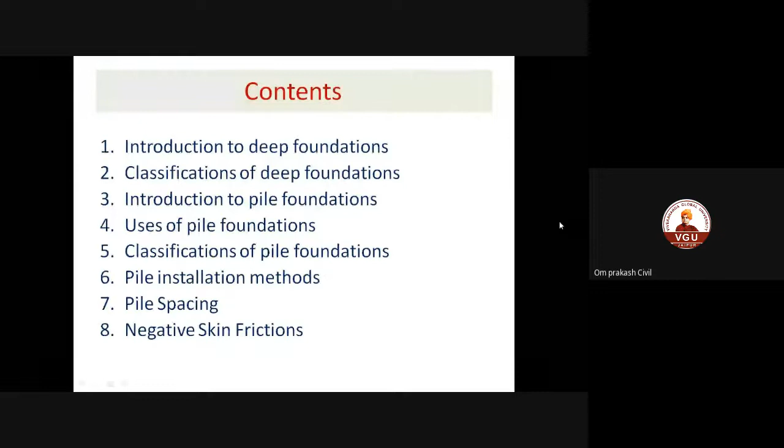In the first part, I'll be talking about the theory, and in the second part, I'll be sharing with you some of the experiences that we come across in the field. To start with, I'll give some details about what deep means, pile foundation, then the various types of pile foundations, how piles are classified, how we can go ahead with the installation, then pile spacing, negative skin friction, etc. This is purely from the theory point of view. In the first part, some 1 hour I'll be talking. In the next 1 hour I will try to share some of the field experiences.

Any problem with the sound? Hello? Is it okay? Can you hear smoothly? Some sound disturbance is coming. So some of you mute it, Om Prakash, mute it so that this... I request the participants to mute, otherwise some sound disturbance is coming.

Pile foundation is the foundation that provides support to the structure from the toe resistance. The toe resistance we call it as end resistance. And it may be from a firm soil, a dense sand, or a hard rock. And from the shaft resistance that is generated by the skin friction that is developed. So there will be two components: one known as end bearing and the other known as the frictional component.

If the load carrying capacity is mainly contributed by the end bearing, we call it an end bearing pile. And if the load contribution is coming mainly from friction, we call it a friction pile. Generally, the pile will take load from end bearing as well as the frictional component. Depending upon the site condition, end bearing may be dominant, or sometimes if the structure is small you will be able to satisfy with friction alone. We call the pile as a foundation as a deep foundation when the depth to width ratio is greater than or equal to 4.

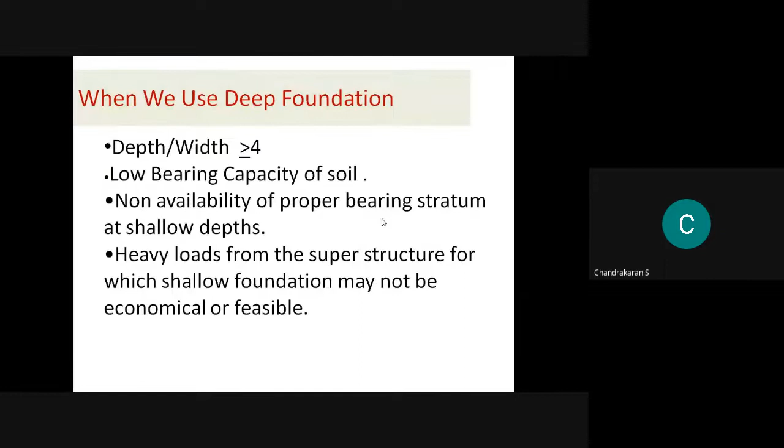Whenever the bearing capacity is low and we want to overcome the soft soils that are present, then we will go for pile foundations. That is when we will not get proper bearing stratum at shallow depths. Heavy loads from the superstructure are likely to come, and we feel shallow foundation may not be economical or feasible. Then also we'll go for pile foundations.

Deep foundations may be classified as pile, pier, caisson, or well foundation, and sometimes sheet piles also included in this. Among all, nowadays caissons and well foundations are getting outdated because the labor involved in construction is very high, and the difficulties in construction of caisson and well foundations are more. In those cases, piles are replacing caisson and well foundations. Caissons or well foundations are heavier in section and are sunk to the required depth, and the process is a little bit tedious.

The pile foundation means a post. It may be made up of concrete, steel, timber, or a suitable material, and acts as a structural element for transferring loads from the superstructure to the deep where strong or firm strata is available. The basic difference between the column and the pile is confined by the soil, whereas column is a freestanding structure. Sometimes the pile may also become a slender member depending upon the availability of the depth of firm strata. Sometimes this pile may be subjected to moments as well as lateral loads. That possibility is also there.

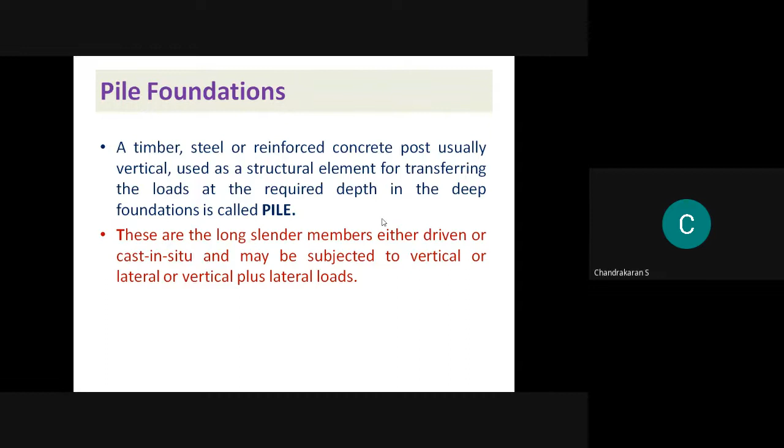Now I am just going through different steps involved in the construction of pile foundations. One is erection of the rig. Rig means the 3 legs and a center there will be a pulley. Then we will try to do boring, that is making a hole on the ground.

For that purpose, we will be using bentonite slurry inside this hole so that caving can be avoided. Parallelly, a team will be doing preparation of the reinforcement cages. They'll be preparing some stands and keeping the reinforcements. Then the reinforcement will be inserted gently into the borehole without touching the sides.

After that, the tremie pipe that is used for concreting will be inserted. After inserting the tremie pipe, the top conical end will be kept on top, and design mix will be prepared and transferred into the hopper. Finally, this tremie pipe will be lifted stage by stage, and during that process it will be given some shakes, meaning it will move all around so that some compaction is achieved. So the third stage is lowering of the tremie pipe, and the fourth one is pouring of the concrete.

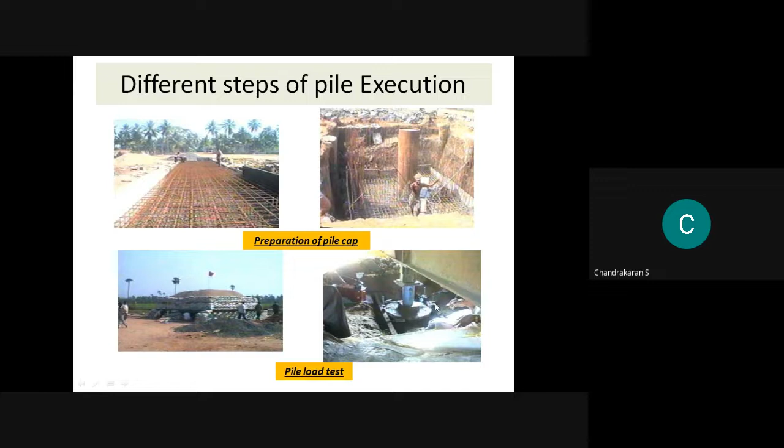Before going into this, the code says we have to test some of the working piles as required. We have to do tests on some of the piles, and that has to be done in order to confirm the load carrying capacity obtained from calculations matches the field conditions. These are the steps involved in the construction.

Now I'll go for the classification of piles. We can call the pile as end bearing or compressive strength type of pile, provided it transfers the load to a hard stratum. The second one is the pile may be used to take care of the scour depth that occurs in a river, or wherever tidal effects are there, we have to take care of the scour depth. Then the pile may be classified as tension pile or uplift pile, and if it is used for taking care of the uplift, we call it an uplift pile.

Sometimes in electrical towers, if there is a breaking of the wire, there is a chance that the tower may tilt. In such cases, the pile may be subject to tension. Such tension or uplift piles have to be taken care of.

The piles also have to be taken care of for horizontal loads. Depending upon the requirement, we change the type of pile to control the anchoring, or sometimes use fender or batter piles. In machine foundations, to control the vibration that is transmitted, called passive vibrations, that has to be controlled, and for that purpose too we can use foundation piles.

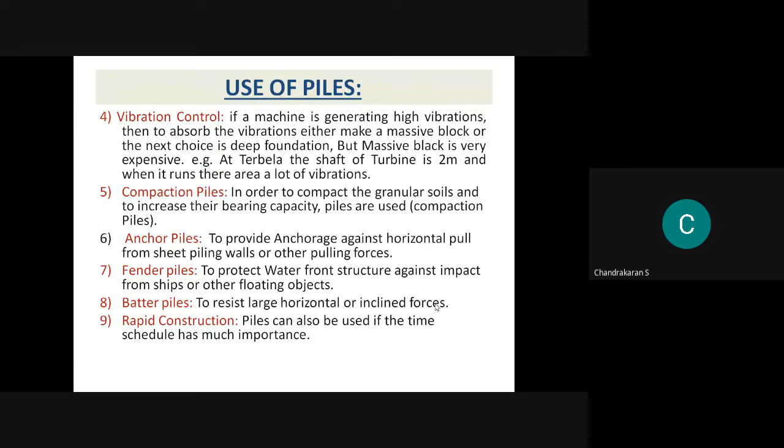Then we have another type known as compaction piles, used for ground improvement in the form of columns. Depending upon the function and the type of load transfer, we can give different names.

The classifications are grouped based on method of construction. This means we can have hand augers, chisel type of drilling which we call DMC piles, or if using a rotary type system, we call it a rotary pile. Like that we give different names. Then it may be a precast pile or a cast-in-situ pile, depending upon the type of construction.

Again, based on materials, it may be timber, steel, concrete, or composite - different names for different materials. Then based on the material of the load that is transferred, we can give composite types too. Many names can be given.

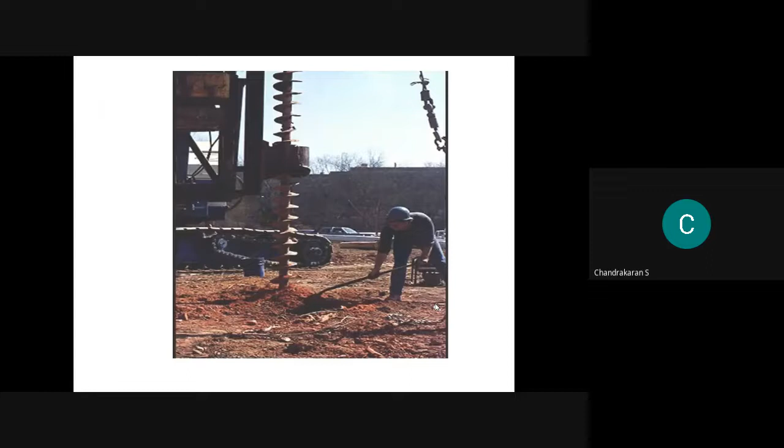The function of the pile is to transfer the load, and again we can classify based on shape and size. I'll show these things - I'll come to the shape, but before that, there's another one.

Nowadays we come across low volume displaced piles. This means that while boring, we will be displacing some of the soil below - that may be low, or sometimes no volume displaced piles. If most of the soil has been displaced, we call it a high volume displaced pile. This can be controlled by the type of machinery used for boring.

Now I'll come to the shape. We can have rounded piles, square piles, octagonal piles, I-shaped piles, straight piles, tapered piles, bell-bottom piles, or screw piles - different piles with different shapes. In Chennai, one company makes Raymond piles; they have their own patent and try to make that type of pile. These are some of the shapes, mainly used in steel piles.

Then a pile can be classified depending upon size - we can call it a large diameter pile or a small diameter pile. Large diameter pile is defined as greater than 24 inches, around 60 centimeters, and this classification varies from code to code. Some books say more than 100 centimeters can be called large diameter, and less than 100 centimeters small diameter.

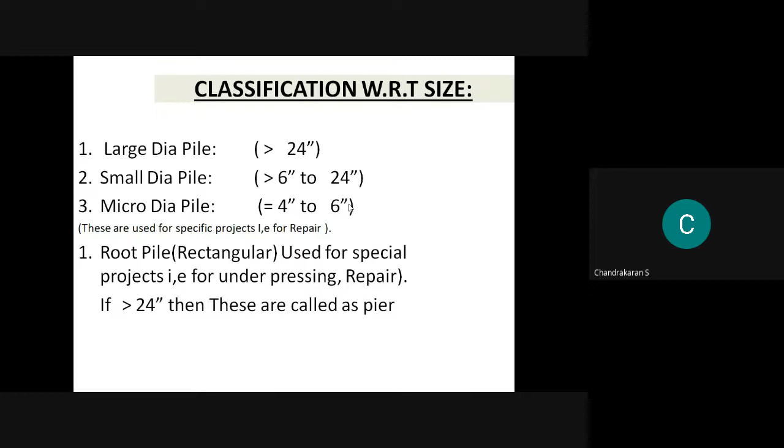Then how does a pile look? It looks like a single long member transferring the load from top to bottom. It may be resting on a hard strata, in which case we call it a point bearing pile. If the surrounding soil also contributes to the load carrying capacity, that contribution is known as friction pile. If the pile is used to take care of uplift or buoyant forces, we call it an uplift pile. Depending upon the need, we design the pile accordingly.

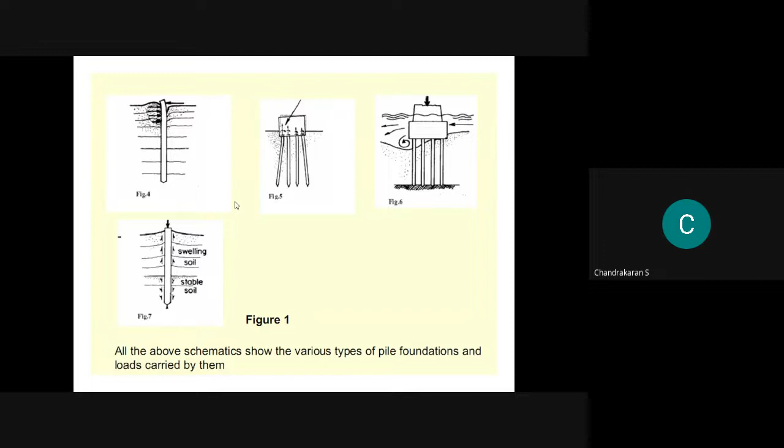Then depending upon construction - this is a precast pile, which will be kept straight, and you hammer it to allow the pile to go down. The hammering should be done in such a way that the soil does not get displaced much - that has to be taken care of, and you have to ensure verticality is maintained.

In the case of bored piles, first the boring will be done with the necessary tools. After making the boring, the cavity will be filled with concrete - first the reinforcement is introduced, then the cavity is filled with concrete. If you fill the cavity first with concrete and then insert the reinforcement, we give it another name: compacted cast-in-situ pile. Like that, we modify the terminology.

Now, the design can be done based on the soil data that is available, either laboratory data or field data. But after the design, when it goes to the field, one has to take care of the installation. Installation is also going to affect the load carrying capacity. So that way, installations are very, very important.

In the case of precast piles, installation is by hammer, pile hammer, or in the case of cast in situ pile, boring by mechanical auger has to be used. Now the installation technique has to be decided based on the site conditions. That has to be well studied before going for the installation.

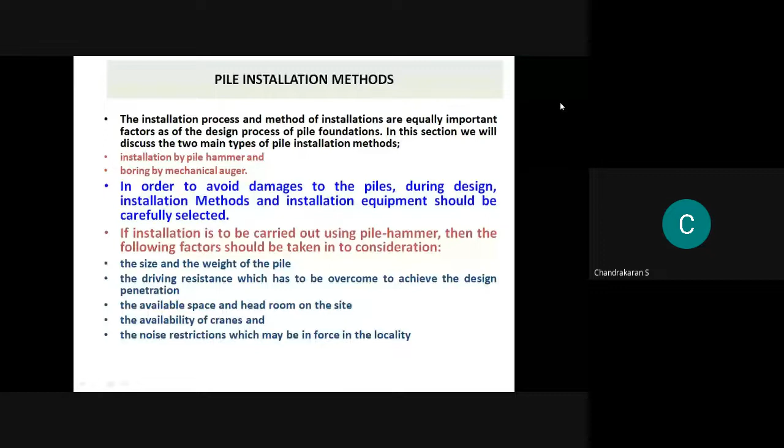Then the availability of the cranes has to be taken into account, which may be in force in the locality. So that also has to be seen. Pile driving methods are by dropping weight, by explosion, vibration, jacking, jetting. All these are used for the precast piles.

Now the piles may be classified as driven precast piles. That is one group - the pile is cast in the yard, brought to the site, and driven by some mechanism into the soil. Or driven cast in situ pile, where a casing plugged at the bottom is driven into the ground, and then the pile is cast by removing or retaining the casing.

Then bored precast pile - a boring is made, the soil inside is removed, and then a pile cast in some yard is put into the bore. Then bored cast in situ pile - a bore is made, the soil is removed, and the pile is cast at the site in the bore. Likewise, depending upon the procedure followed, different names are given, and this is for precast piles.

We have different types of machinery like drop hammers, single acting steam or compressed air hammers, or double acting pile hammers. We have different machineries available, and the efficiency of the system will vary with the hammer used. For example, if you go for double acting pile hammers, the efficiency may be around 0.6 to 0.7, and if you use drop hammers, the efficiency may be 0.3 to 0.4. So again, depending upon site conditions, feasibility and requirements, we select the type of hammer that is required.

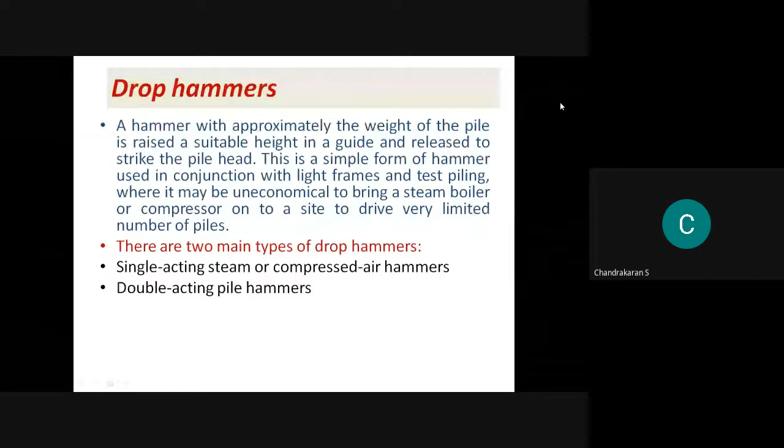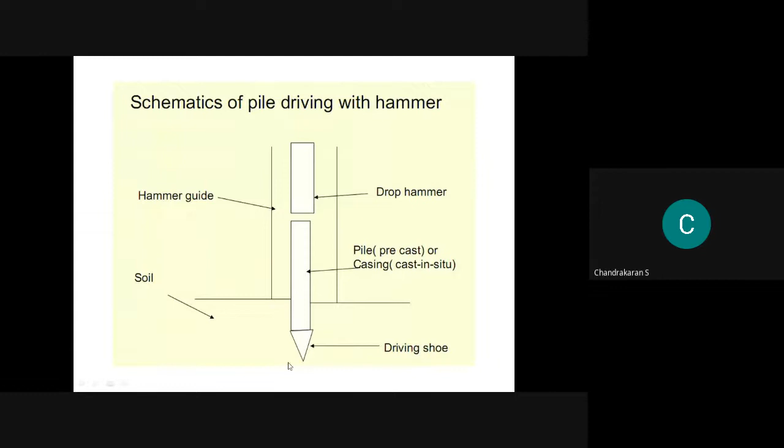Nowadays, helical augers are also used for rotary boring. One advantage of these helical augers is that while taking the soil out, we can clearly see the soil that is coming out, and we will be able to compare it with the soil data that is available - the borehole data can be compared with what is taken out. So that way you can ensure that the design that is done is okay.

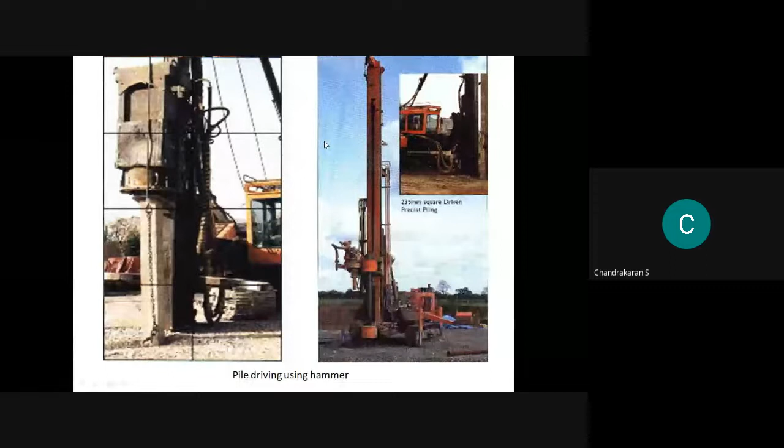This is precast piles - I will be showing this again. I am just showing you the rig and the details. Now, just one minute, I'll just join.

What are the loads that come on pile foundations? The loads are basically from the superstructure—dead load, live load, wind load, and seismic loads—then loads from the surrounding soils. In the case of a seismic event, there will be lateral loads, and in offshore structures, there may be water loads, wave loads, etc. These all have to be taken care of.

If the pile is on land, we have to take care of the dead load, live load, and if necessary, wind load, then seismic loads.

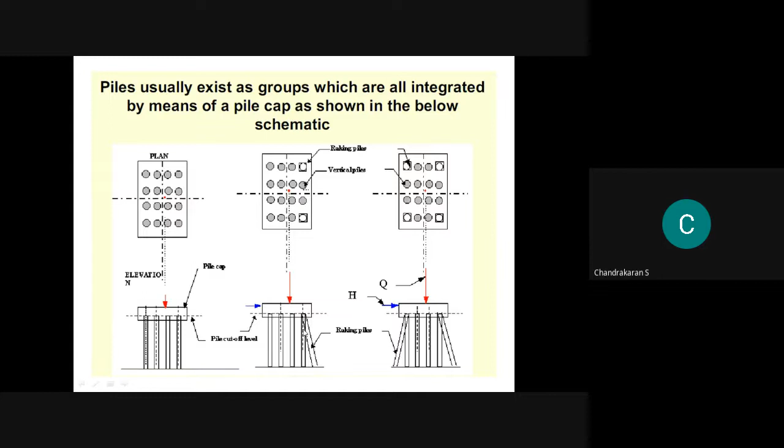A single pile is generally not advisable. To take the column load, we use a group of piles, usually arranged symmetrically, and there are methods to determine pile spacing, that is, spacing to diameter ratio. Larger spacing means a larger pile cap; smaller spacing means a smaller pile cap, but the load carrying capacity of the pile will be reduced. If there are horizontal forces, we add raking piles at the edge so that horizontal force can be taken care of.

Now, what are the ways the load will be transferred from the pile? It depends on the length of the pile, the diameter of the pile, and the soil strata. If we have strong end bearing, we call it an end bearing pile, and the load carrying capacity is generated from end bearing combined with friction. If the structure transmits only small loads and there is no end bearing, then the load carrying capacity will be only from friction—these are called pure friction piles.

If the pile is very small, we call it a short pile, and the minimum length we generally prefer is 3 meters; the load capacity is calculated from bearing capacity equations. If the pile is very long, we use a slightly different bearing capacity for the deep layer with modifications in calculations. And if the pile is very long, we have to consider the possibility of buckling and the effect of lateral loads.

These are the mechanisms by which load is transferred through a pile. To calculate the load carrying capacity, we use geotechnical capacity, considering soil parameters. The second approach is calculating load carrying capacity when the pile acts as a structural element, treating it as a column. The difference between designing a column and designing a pile is that the pile is surrounded by soil, so we must consider the confinement, which is an advantage.

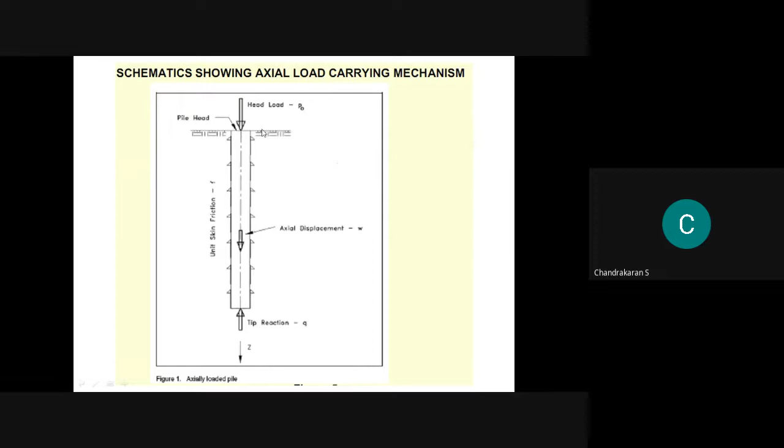This is how it looks—the end bearing reaction as well as the skin friction, and the top vertical load that comes in will be taken by the head. These are the ways in which the load is taken, as already explained. In the case of lateral loads, the pile may get deflected, which also has to be considered when there are significant lateral loads likely to come due to water pressure or seismic action.

Now, in the case of uplift, we have to consider the pile in tension also. The pile may be subjected to compression or the pile may be subjected to tension—both have to be considered.

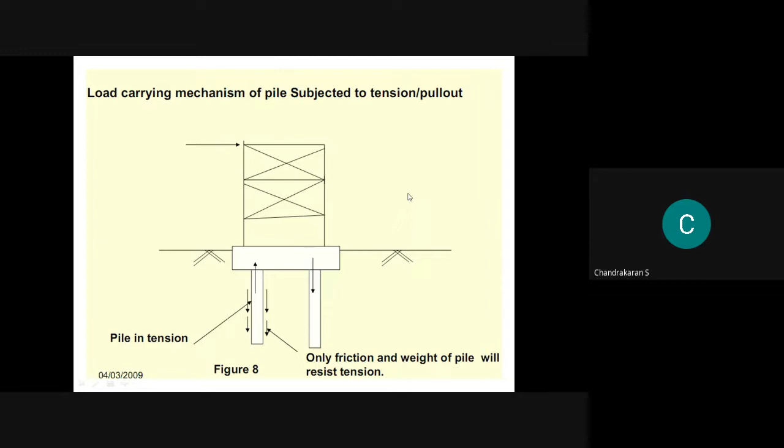Now these are the ways in which the load will be taken care. The load is calculated for the axial capacity, then the lateral capacity, then pull-out capacity or tension capacity. If we are doing the load test and try to get the load carrying capacity, generally people prefer for the axial capacity, then the other two will be derived from that, lateral capacity and pull-out capacity. Testing for pull-out can be done for small piles, but for long piles it will be slightly difficult. There are procedures for finding the field test for the lateral capacity also. So whenever we want to do the design, we need axial capacity as well as lateral capacity as well as pull-out capacity, or tension capacity. All three are required.

IS code has given clear procedure for the calculation of the axial capacity for clayey soils, or if the soil is clay or sandy soil. From that, we have methods for the calculation of the lateral capacity and the pull-out capacity.

Basically, we can do this by field approach as well as theoretical approach. Field approach means whenever we want to design pile foundation, we have to do soil boring. The soil boring will be done, samples will be brought to the laboratory and the sample results will be obtained. But the difficulty is we will have only limited data and we presume that the same data is applicable for the whole area. Instead of that, one can do a test in the field, cast a pile, do the test till it fails, then back calculate what may be the soil parameters involved, and from that we will be able to go ahead with the design. That is known as field approach.

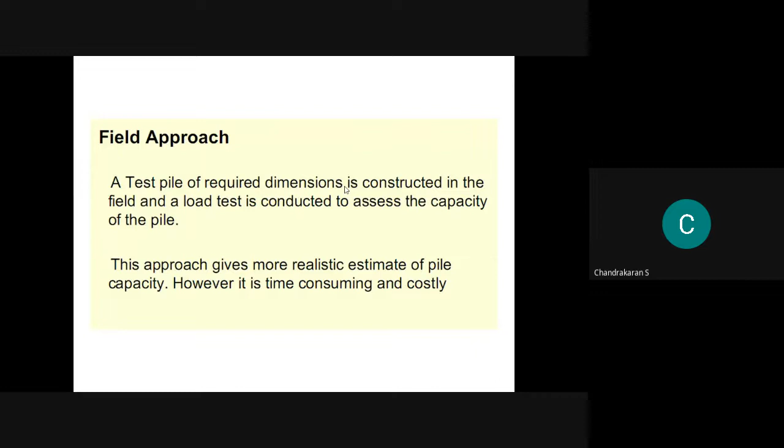The other method is based on laboratory test data, where we do the design. In that case, we have to do what is known as a routine load test. As per the code, I think for every 100 piles, we have to do one routine test. In that case, we will not allow the pile to fail. We will go only up to the allowable settlements, then we will start unloading. I will explain such a load test again if time permits.

Otherwise, nowadays we have NDT tests available, like low strain integrity testing or high strain integrity testing. Load tests also can be done for dynamic loads, lateral loads, or cyclic loads, etc., all possible in the field.

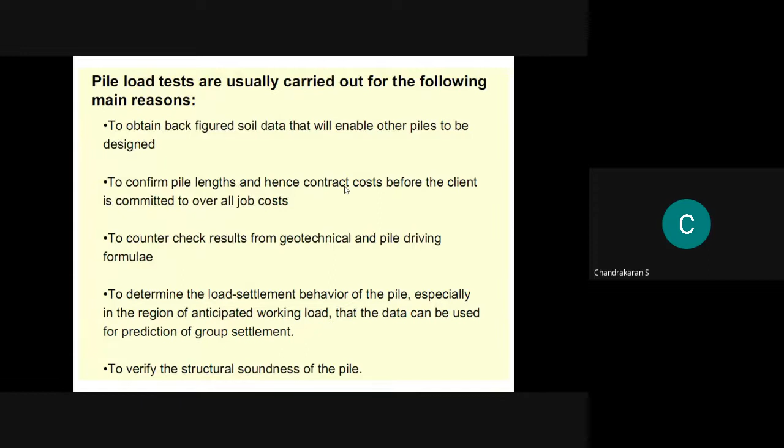Now, pile load test is essential, we cannot avoid that. Pile load tests are usually carried out for the following main reasons: one, to ensure that whatever design is done is perfect or satisfying for a particular site. Then to confirm the pile length, hence the contract costs before the client. That has to be done in the beginning so that we will get an idea about the depth and other details, or the type of machinery used, etc. Then verifying the structural soundness of the pile, whether it will be working or not, that also can be ensured. Many advantages are there for doing the pile load test.

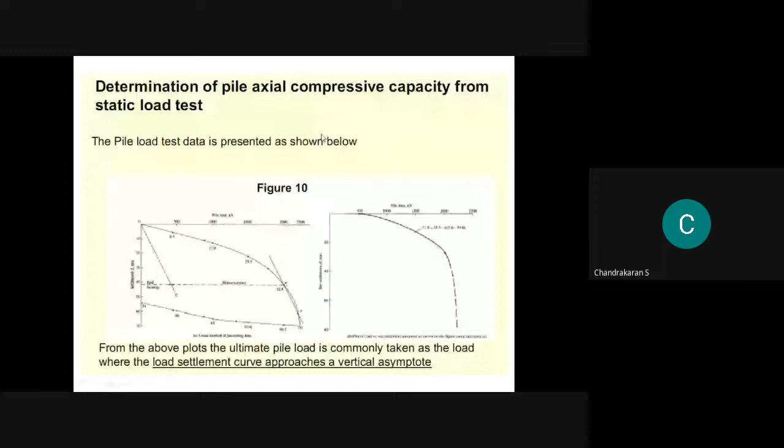Now, from the load test, we'll get the load-settlement graph, with x-axis as load and y-axis as settlement. When it almost fails, we start unloading in almost the same manner, and we get the rebound curve. From the load-settlement graph, there are procedures for calculation of the tip resistance - here you get the end bearing resistance, and this part gives the frictional resistance. So you will be in a position to get end bearing resistance and frictional resistance. One can back-calculate what may be the cohesion developed, and what may be the bearing capacity factors approximately, or if end bearing resistance is known, we can redesign if necessary. That is also possible from the theory part.

Now I'll go to the second one.

Some problems are seen when the pile is socketed in rock - say what depth you have to socket it. For example, in the Malabar area, we come across lateritic soils, and below that, weathered rock. If the weathered rock exists for a large depth, then only hard rock appears. Is it necessary to go up to the hard rock or not required? Such questions are likely to come, and how we can address that is what I want to explain in this coming PPT.

There are codes, and different codes give different amounts of socketing. For example, IRC recommends 50 centimeters, while railway code recommends 1 meter. Different values are given like that. So socketing depends upon the type of structure and the need, and accordingly we will go for the socketing.

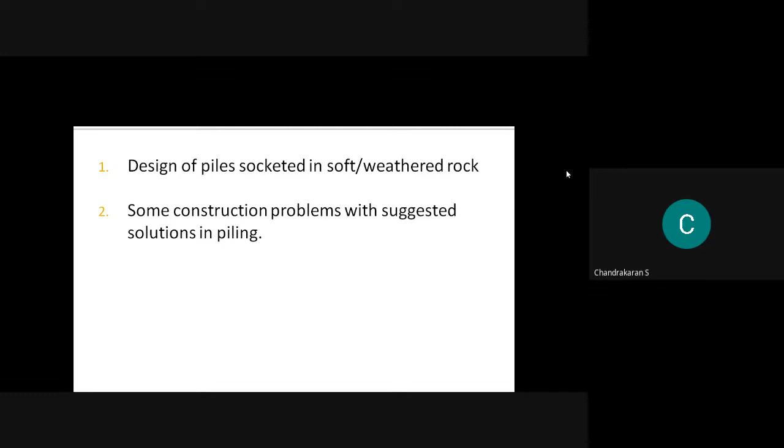The second part is some construction problems that I'll be showing you. In sedimentary as well as weathered areas, we come across soil, then gradually it will reach the rock. That is the procedure that is seen - that is the soil strata that is seen.

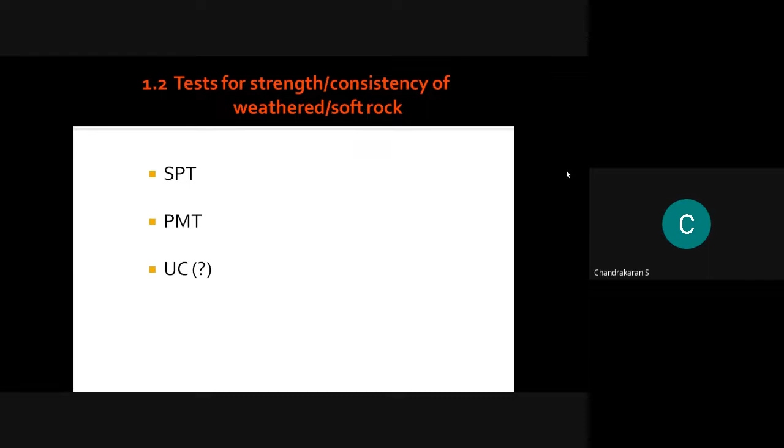We can get the strength of this rock by conducting SPT tests, pressure meter tests, or by taking undisturbed samples and doing unconfined compressive strength tests, etc.

The N values generally vary from 0 to 60; soft rock and weathered rock give N values around 60, while very hard rock can give any value. N values help to some extent, but doing SPT tests in hard rock and comparing 100 and 200 may not be that good.

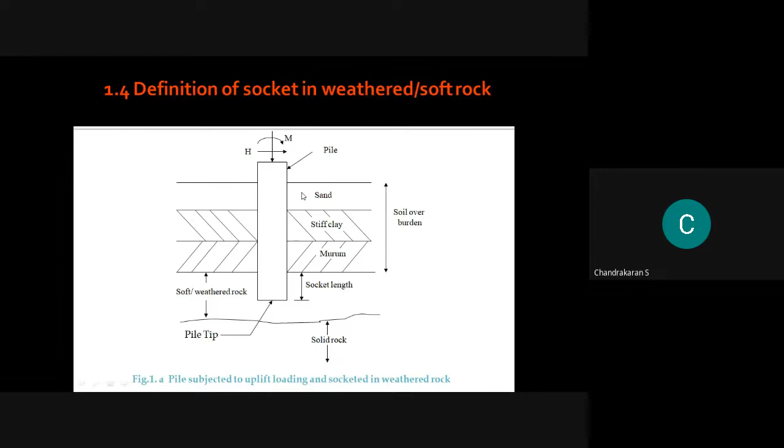This particular pile is resting in soft weathered rock, with different types of layers above it. If the weathered rock profile is inclined, then we call this the socket length - this part is the socket length and not the other part. So the minimum socketing length, if we define it, has to be satisfied on the lower side.

It is very difficult to know whether the soil is hard enough to stop the pile at that particular depth. Generally, we have to do some kind of testing, and we have different methods of testing.

I told you one is SPT. SPT is not 100% reliable for this, because SPT values of 200, 300, etc. cannot be compared reliably, and it is also tedious to do SPT to those values.

Another method is during soil boring, where we get RQD and rock recovery, etc. Based on that, we are able to tell whether the particular layer is hard or not. Otherwise, we have to do a UCC test, get the crushing strength, and ensure that it is satisfied. These are possible before going into the field.

As per the code, we can proceed if the hard layer is defined and reached - for instance, if you are expecting 2000 kilonewton per meter square crushing strength, and that is reached, you can go for 2 to 5D embedment. D is the diameter of the pile, and experience says 2 to 5D is sufficient. That is what some field people have reported.

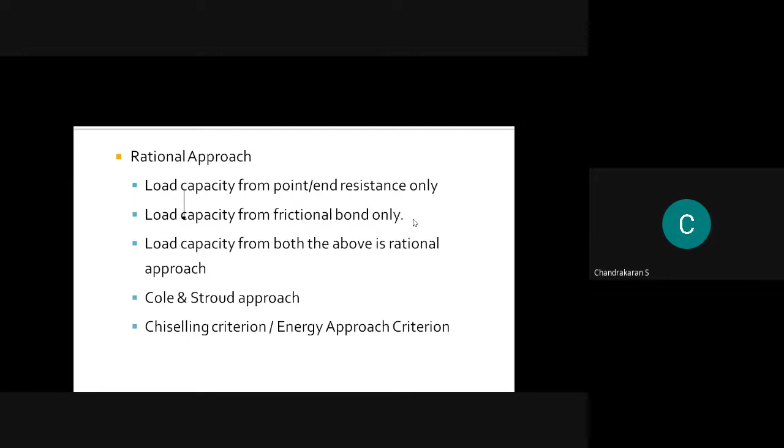It is much better than going for the SPT test or taking an undisturbed sample and finding out the strength. This will be much better, and this has been practiced by many practical engineers in the field.

This part I'll skip. Basically, it is well established, as written in Mumbai practice. Some of the terms used are, say, 10 centimeter if you are using 750 ton meter per meter square for 3 consecutive trials. Like that, one can give. In such cases, no SPT test is required.

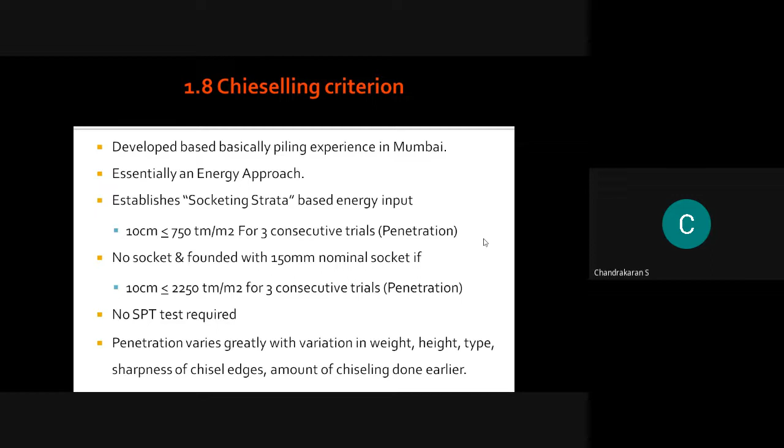Penetration varies greatly with the weight, height, type and sharpness of the chisel edges, and the amount of chiseling done earlier. That has to be considered. Then only we'll be able to give the chiseling criteria.

So socketing can be done even in weathered rock or soft rock, and one can construct the pile. There is no difficulty, provided the weathered rock is available for large depth and you are not in a position to go up to the hard rock—you can, but that is not worth it.

Now the second part is some construction problems with the suggested solutions in piling. I will be giving one or two here.

The second one is the lateral ties. We write them as 8 mm or 10 mm at some particular spacing. But in piling, what is done is the reinforcement is tied in a helical form, and at regular intervals some tie rod is welded inside. That is the practice that is followed.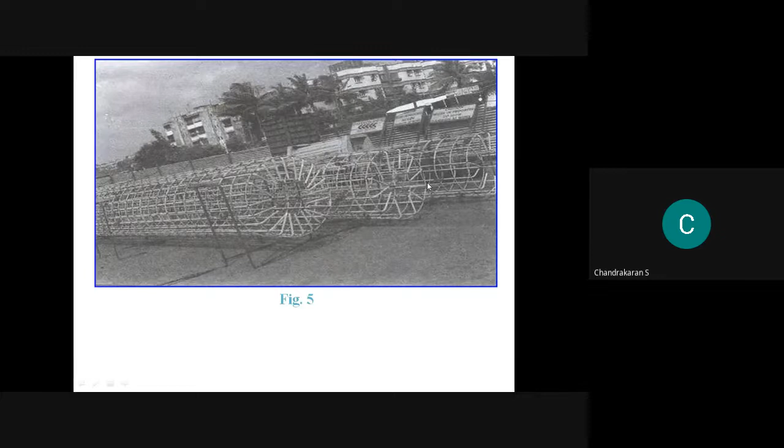This storage practice is good because it is not touching the soil, so corrosion possibility is lesser. But the L-bend practice is not good. Again, they are bent like this.

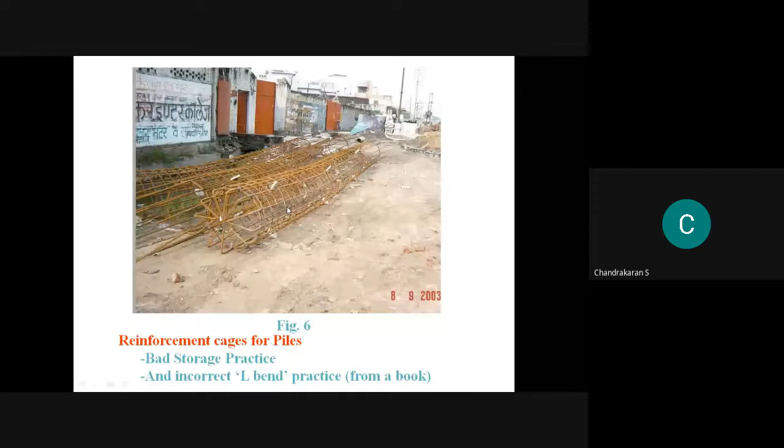Now, this is not a good storage practice, nor a good L-bend practice. You can see here the reinforcement cages are made and simply dumped on the ground, and finally it is getting corroded because the soil may have some acidic nature—it corrodes very fast. Also, the L-bend practice is not good.

Now you can see in this particular one that there is no real L-bend—just for the namesake they are bent like this. The reinforcements are bent and the bottom one is opened fully. I forgot to mention these are known as the covering blocks, which are tied along with the lateral ties.

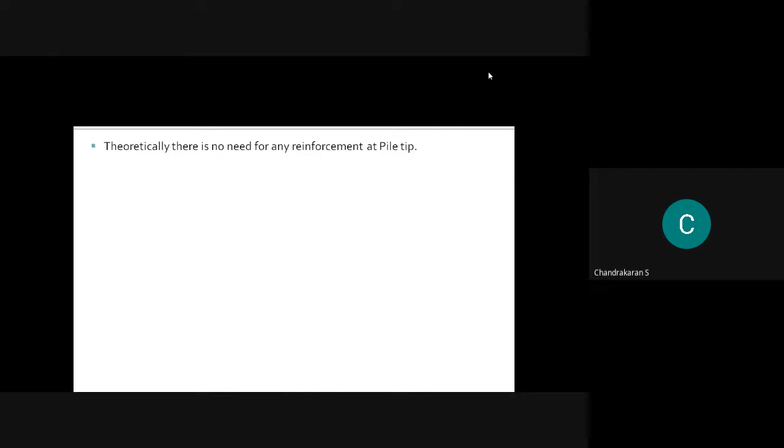Now I am just showing you there is no need for any reinforcement at the pile tip. This is as per the requirement—there is no need for any L-bend.

The L-bend creates a problem: the bending prevents the tremie pipe from reaching the borehole bottom. The tremie pipe is the one used for concreting. It will not reach the bottom; it will be standing on the reinforcements. Then concreting through the tremie pipe by displacement cannot be achieved unless the tremie pipe is initially placed to rest at the pile borehole bottom.

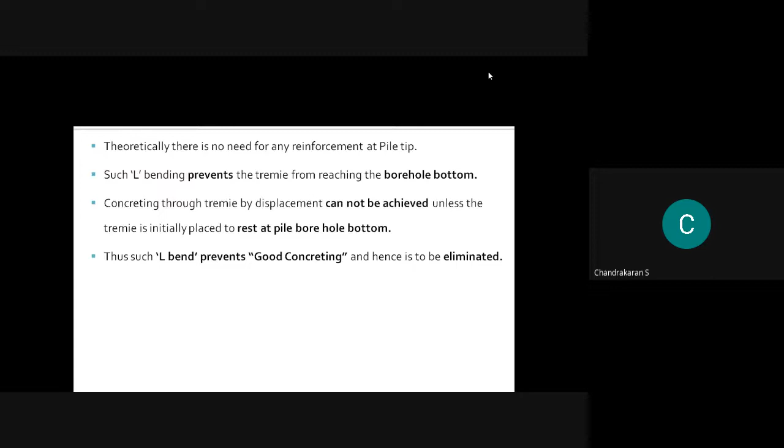That is one of the difficulties seen if you go for L bends. So L bends prevent good concreting and are to be eliminated. If some designers want an L bend for the cage to properly rest on the pile hole bottom, then just namesake you can give 3 centimeters or 5 centimeters. That is more than enough, and that will be a much better practice to follow.

Guide casing is used only for 1.5 to 3 meters. If you use more than 3 meters, taking it out will be a problem, and in some cases they may break at the joints. That is another problem seen. So generally field engineers prefer only 1.5 to 3 meters, which is more than sufficient, and it will not create any problem of soil falling from the surrounding.

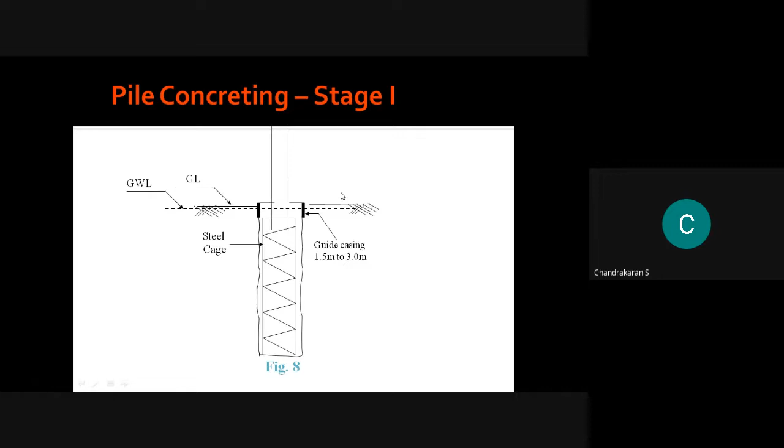You will be inserting the reinforcement cage into the borehole. Then on the reinforcement cage you will be inserting the tremie pipe. Now you can see when you insert the tremie pipe, it should rest on the borehole, not on the reinforcement. If you do an L bend, it will rest on that, which is not required.

After that you have the plug. That plug will be closed, and the design mix will be mixed in the mixer machine, and that will be transferred up by opening the plug. Now you can see the concrete has gone up to the bottom, and you have to see that your tremie pipe is gently taken back.

The procedure adopted is the tremie pipe will be lifted by small lifts. The depth of the lift is 0.2 meter to 0.3 meter, and you will be giving some compaction inside so that your concrete will be compacted.

You can see here the concrete will start displacing through the sides. When you lift, the concrete will start displacing through the sides and start coming to the top. During that process some of the soil may be mixed with this concrete, and sometimes bentonite slurry mixed with the concrete will come to the top. So the top portion of the concrete will not be a good one.

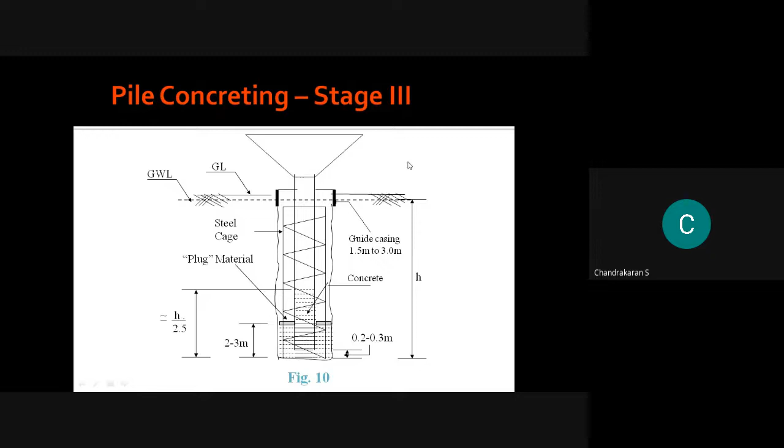Then another point I would like to add is this tremie pipe nowadays has a minimum diameter of about 20 centimeters. So if you are using bored piles, the minimum diameter that has to be used is 40 centimeters. Even though the code says start from a small diameter, it's difficult to make a pile less than 40 centimeters, and it is not worth it. So minimum dimension we have to go with is 40, 50, 60, like that in the case of bored piles.

The top portion of the pile will be mixed with bad concrete, a mixture of bentonite and some soil, that has to be chipped off. This chipping can be done with the help of chisel and hammer. Another method is vibratory hammers, also used to some extent. That also can be used for breaking, and this breaking will be done till you get the fresh concrete.

Some contractors use big vibratory hammers that will be affecting your pile. If the pile length is very small and you use some hammer like Bosch hammers for breaking the concrete, micro cracks can be formed inside the pile, and that will affect your load carrying capacity.

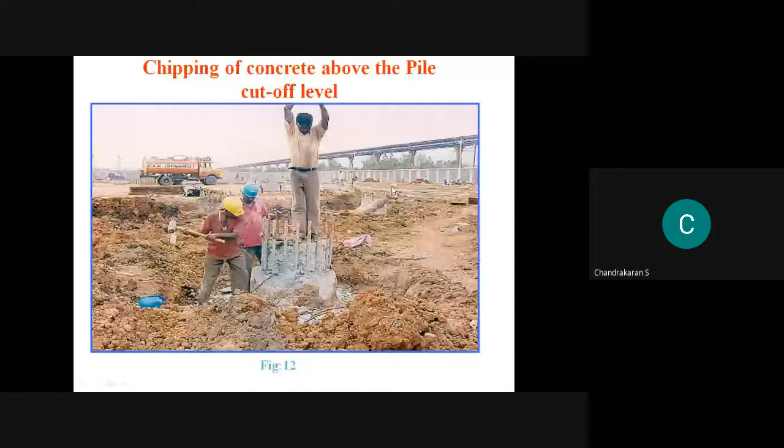Another point we want to stress is whether the pile chipping has to be done soon after the concrete or after curing. Many debates are ongoing on this. Some of the leading company engineers say it is preferred to do it soon after concrete, so that the concrete will be fresh. Don't wait for any kind of curing. Soon after concrete, you try to remove that, so that the removal will be easy and it will be ready for making the pile cap. That is what they are telling.

So the chipping can be done soon after the piling, instead of going for the chipping after curing. After curing, the concrete may get hardened, and when you start using vibratory hammers, there is a chance that cracks will be formed.

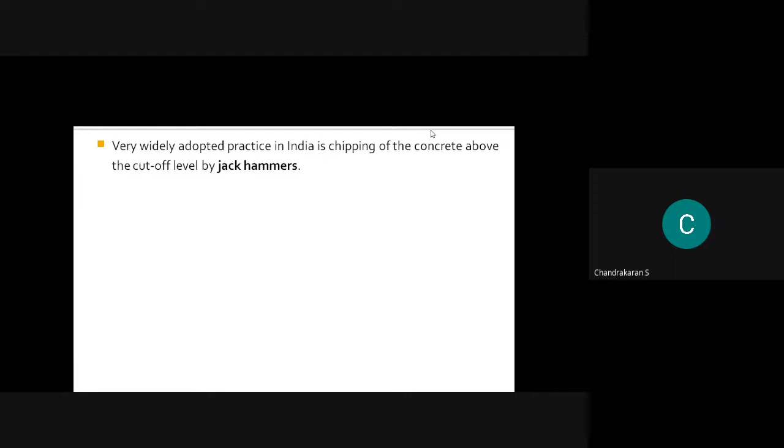It is recommended, as I am briefing out, to use chisel or small vibratory hammers in order to chisel it. That is the best one. The removal should be done till you come across the fresh or green concrete. From that step onwards, one will be able to make the pile cap, or if necessary, some people may build up and go to the required height. That is also possible.

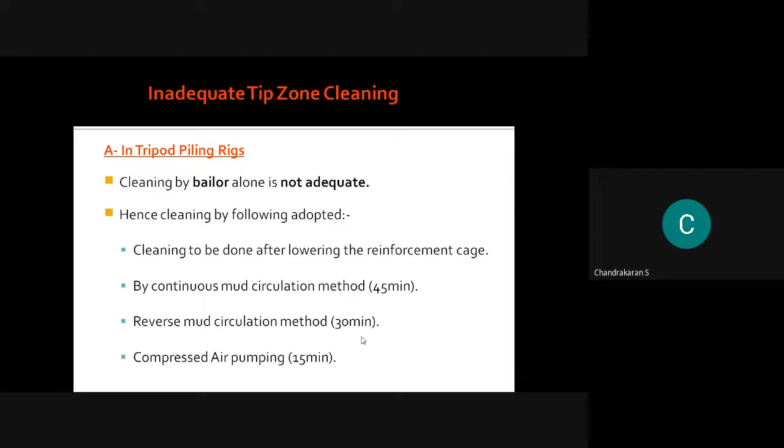Now, this cleaning of the borehole also has some procedure that has to be followed. Then only the borehole will be fully cleaned. Otherwise, some material will be left out. For that purpose, we have to do proper mud circulation, then reverse mud circulation. All these things have to be followed. Then only we will be getting the correct clean borehole. That has to be done properly, otherwise some material will be left out, and that may give in situ settlements.

Another problem observed in making the pile in sandy soil is, after making the boring, if you start inserting your reinforcement, it will not stand in its position. It will start moving up and down. That is one of the problems that is seen.

In the case of sandy soil while making the pile, it is observed that whatever pre-calculated concrete - generally people pre-calculate what is the amount of material that should go into the borehole - in the case of pile made in dense sand or sandy soil, some concrete will be left out. That is one of the observations seen. In such cases, we have to do the removal of the tremie pipe in a very cautious manner. Second, the density of the bentonite used in the borehole has to be controlled, made more thickened. Like that, we will be able to, say, to 95% extent, make the working better.

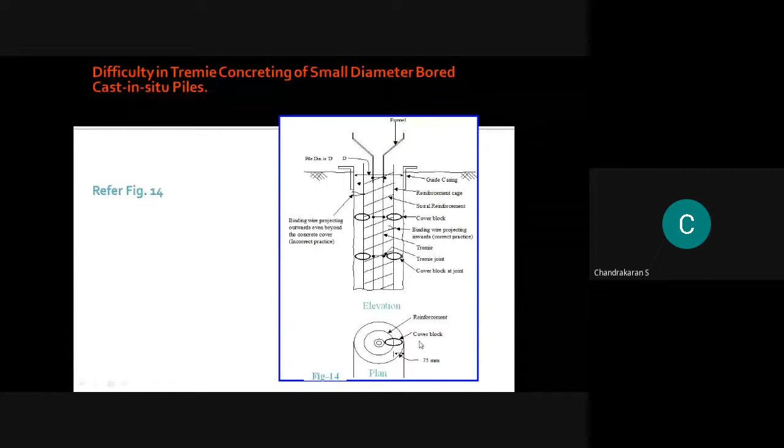Now these are some of the problems that are seen. Then you have to see what is the cover that is to be provided, has to be done properly. That also has to be done. Cover to reinforcements are mainly calculated from the main reinforcement edge, but as you have seen in my photograph, this cover is connected to the lateral ties. So there will be a small difference that has to be taken care of in a proper way, by making the proper cover blocks.

This one I'll skip, as there are possibilities that the pile may rest on isolated boulders. This type of problem is likely to come in the field. The boulder I have shown is not small, it may not be 1 meter by 1 meter, it may be 4 meter by 4 meter or even bigger. In between the boulders there may be cavities. Suppose one pile is resting on a boulder and another is going through a cavity, there will be a difference in the length of the piles. Such a possibility is there.

This you have to ensure from the soil profile data. Second, you can do some kind of electrical resistivity or NDT test to ensure the pile is not resting on the boulder but has sufficient depth. That has to be taken care of and looked into.

After boring, some kind of sounding tests are available with the help of which you will be able to ensure whether the pile is resting on the boulder or resting on hard rock.

Another problem observed is in one of the bridges in Calicut, where one pile is resting at 20 meters and another very close pile has gone up to 40 meters. Then the load distribution may not be uniform. They want to ensure that the 20 meter pile is resting on hard rock. That is also ensured by some testing, confirming both piles are resting on hard rock. That way it is taken care of.

This is another problem observed in the field. If we come across some decayed wood layer, a very soft layer, or a layer with negative skin friction, there is a possibility that when you do concreting, the concrete may start moving in the horizontal direction in this weak layer. In that case, some portions of the pile may be exposed only with reinforcements, or the diameter available will be very less.

The second case is some areas may have bulging. We know this when the pre-calculated concrete is pushed into the bore hole, and sometimes even 75% or even 60% might not have been covered. In that case the poured concrete has gone in some other direction. That has to be anticipated. So this type of bulging and necking possibility is there in some soils, and this also has to be taken care of while making the pile.

If you come across a hard layer, that is okay, it will give you the strength. So bulging and necking possibilities are likely to come, and that has to be addressed.

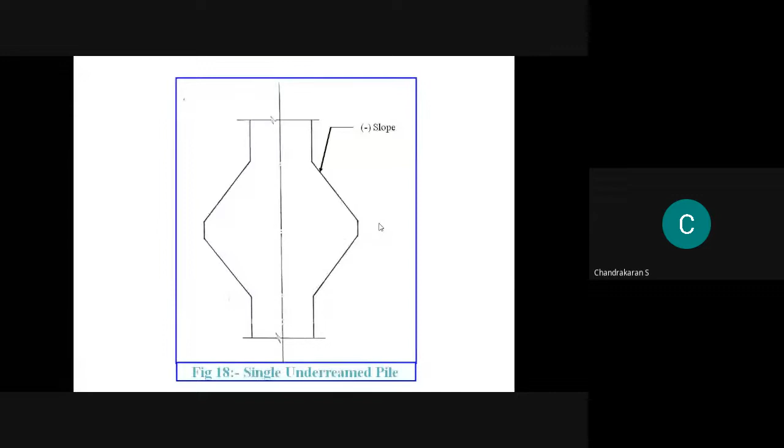As per practice, we can go even up to 5 bulbs. As per theory, we can go 5 bulbs in a single pile, but practically people are restricting to only two bulbs at most, so that the caving or falling of soil inside the borehole can be limited.

Now if you look at IS 2911 part 3, a table is given saying it can be used for the design of underreamed piles in sandy soil, clay soil, black cotton soil, or any type of soil. This is given in the IS code, and we are using this, and we found the results are working very well. There is no difficulty, only that for some soils this will not give 100% perfect results, but it still works. Another reason is this was prepared long back, when mild steel was used.

Nowadays we have Fe 500 or Fe 550 steel, and the grade of concrete is also better, so this table is working very well. But from practice, it is seen that...

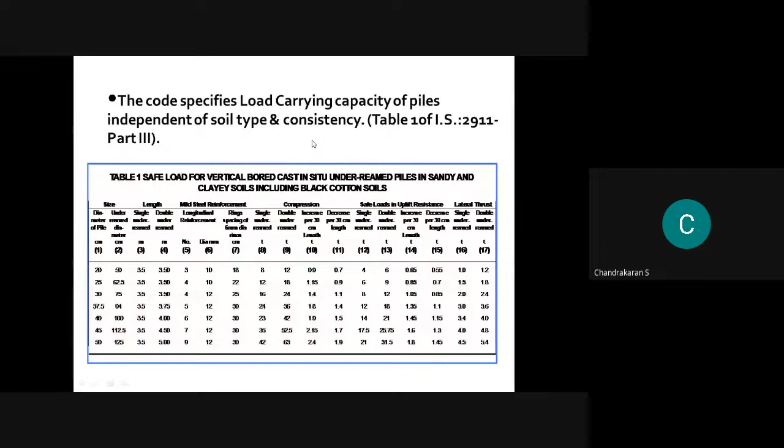the underreamed pile in sandy soil, whether it will work or not, for that purpose some testing has been done in IIT Chennai. What they have done is they prepared a test pile in a sandy layer, made the pile, and taken it out after curing to check whether the bulb formation is there or not, or whether the pile is intact or not.

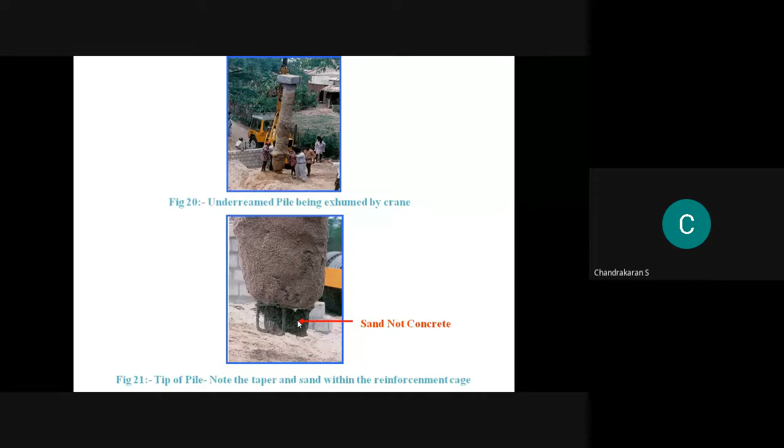Now you can see the size of the bulb. The bulb is only limited, and there is no proper concrete here. So in the theory part, we may be calculating that the bulb will be taking the load, but in sandy soil, even with utmost care taken, there is no bulb formation that is seen. So this type of problem may come in the field.

Now there is no good concrete here. Also they are able to peel out the concrete. So underreamed piling in sandy soils is very, very difficult, and to some extent generally it is not recommended. Even though the code has given the details, practically it will be a difficult process, especially making the bulbs.

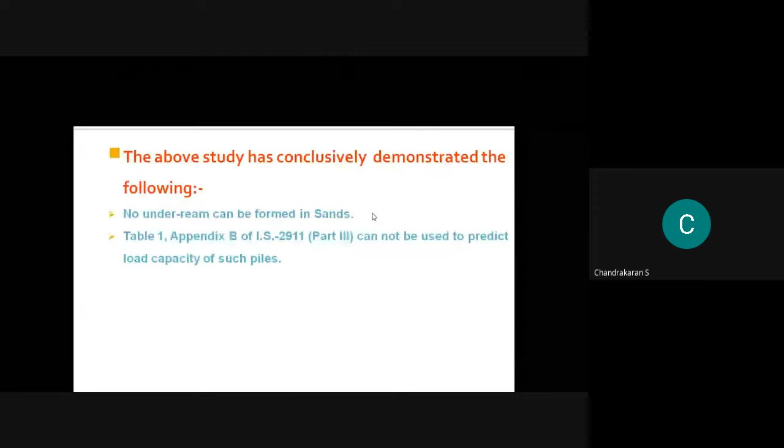These are the things I would like to cover in this set. Now I'll go to the next one. There will be small overlaps, but I hope it will not create any problem for you. Now I'm just going back to the first one.

If we use isolated footing, the isolated footing will create a pressure bulb for the stresses that develop. And if this pressure bulb is lying in weak soil, that is not desirable. Even if you take very low bearing capacity and try to design with that, it may satisfy the shear criteria, but it will not satisfy the settlement criteria.

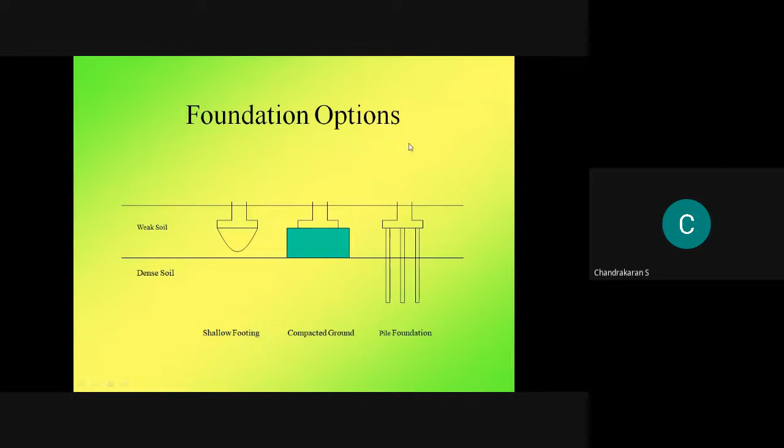In such cases, we will go with ground improvement techniques. If the structure is very small, you can replace the weak soil by a good layer like sand or quarry sand and construct with isolated footings. If the ground improvement techniques are not working and the structure is carrying heavy loads, then only we will go for pile foundations.

Now, in the present condition, there are good developments that have taken place, and with the help of these developments in machinery and our knowledge, we are in a position to cast piles even in the sea or any place, river, ice, or wherever required. We have different types of piling systems also, so we will be able to do any kind of piling nowadays.

Now if we are using piles in the sea, there will be small modifications compared to what we do on the ground. In the sea, the possibility of corrosion is more, so some kind of liner, 6 mm or 8 mm, a steel casing, will be used. Also some batter piles are used because the wave action may be in a certain direction, so batter piles are used in order to control the horizontal load.

Now, if you go for offshore structures, we have again different types of piling, like tubular piles with a hollow section, so that water will enter and it will stand vertical. That possibility is there. Then we have some platforms, depending upon the site conditions - we may go for fixed platforms, compliant towers, tension leg platforms, or anchoring systems, etc. Many things can be done.

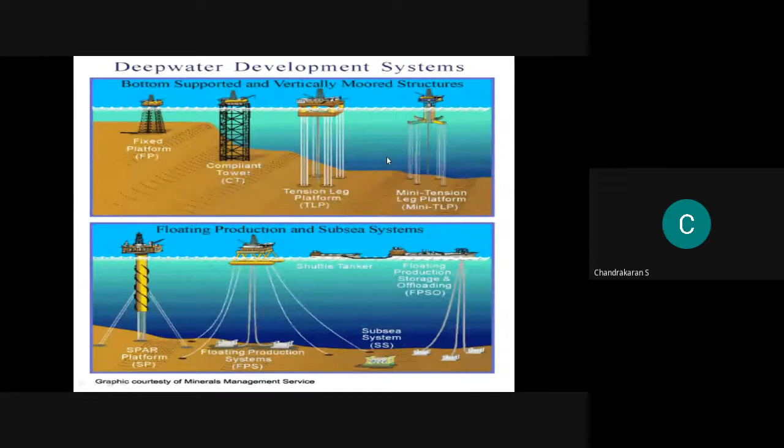Now here, some small topics I am covering: one is the pile design. Pile design can be done with IS 2911 Part 3.

In that, we have input as soil data. This soil data is obtained from the borehole. But you can see in any project, we will be doing only a limited number of boreholes. We will not do a very, very large number and make a data bank. That is one of the observations that is seen. Now, that will lead to limitation of the soil data.

When you go for, say, a very big yard where 10,000 piles are coming, you may do some 10 boreholes. These 10 boreholes will not give exact values. So when you do piling, you will be looking at the real soil profile in the field. From point to point, you will be getting the soil profile. But the design is not necessarily going to match with the soil profile that is seen. Soil profile may be uniform or it may not be uniform. If the soil profile is not uniform, our design may be affected. That is what is the limitation of the soil data in the design.

Second one is, depending upon the machinery that is used for installation, our design load may not be correct. If you do the design and use hand augers, definitely the load carrying capacity will be lesser. And if you compare the load carrying capacity for the same pile, in a particular area, you make a pile with a rotary rig, with a tractor mounted hydraulic rig, and another one with a DMC pile, both will give you different values. So the method of installation of the pile is going to influence the load carrying capacity.

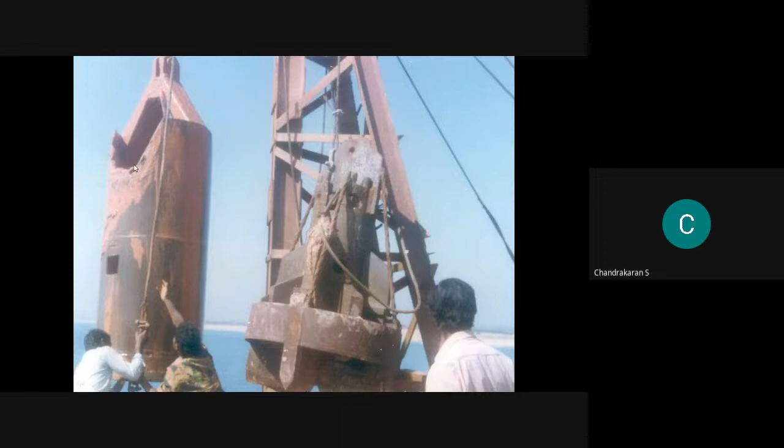Here you can see another rig that is used. You can see the bottom one, the sharp edges, and the attachments. This is another one, another type.

Another advantage is after making the bore hole, you can simply rotate with the help of this rig and easily, in no time, go to the next point and start drilling. That is the advantage. You can also change the teeth depending upon the type of soil that is coming.

We have different types of teeth attachments possible. The drawback is that some of the soil will be left out in the bore hole which cannot be taken out in this rotary system. Especially in the tractor mounted rotary system, some soil will be left out or some cone shape will be there in some rotary boring. There we will not get an exact, clean bore hole. So the load carrying capacity will be slightly lesser.

Also, socketing will be very difficult in the rotary system. Socketing, you have to break with the help of the chisel only, and that may not be possible in this type of rotary system. Otherwise, you have to go for hydraulic rigs.

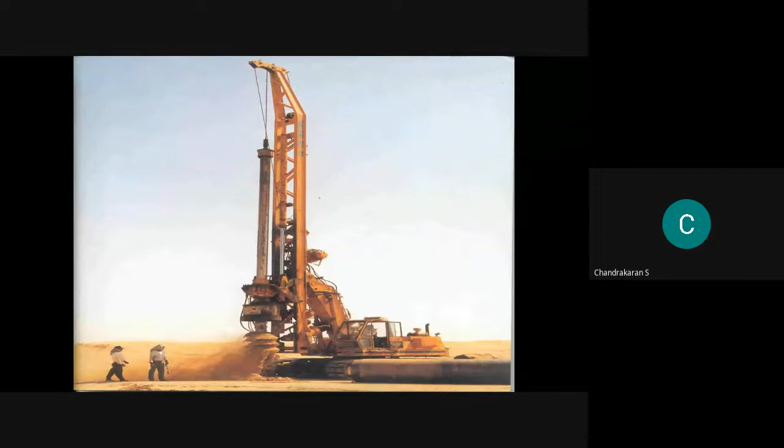Another type of rig available is a very small diameter rig, mainly used for continuous flight augers and screw piles. Screw pile means the diameter will be small and the amount of reinforcement used may be 3 or 4 bars, or less. The advantage of this type is that a large number of piles can be done in a day.

If you go for DMC piles, generally people do only 2, at most 3, in a day. More than that is not possible, because soon after boring you have to do concreting - that is essential, otherwise caving may take place. If you come the next day and do concreting, you have to do reboring again. Even in rotary boring, the number of piles achievable is less, whereas with this small continuous flight auger you can do a large number of piles in a particular day. Now, this is mainly used for small loads, not for large loads.

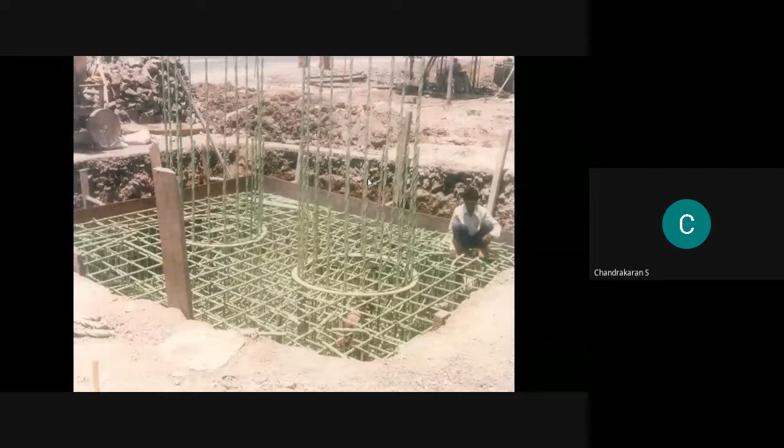Now this sketch shows what is meant by a pile cap. A pile cap is a structural element which is in between the superstructure - these are the columns - and below it you will have the piles. So this is a pile cap, a structural element. What it does is the load from the column will be well distributed in the pile cap, then it will be transferred to the pile.

Now you can see in the pile cap, the reinforcements will be taken up to the top and bent properly and kept - you can see here the reinforcements of the piles. The practice we follow is that the reinforcements are kept at the top but below the top layer of reinforcement. You can see the person sitting here, and the reinforcements are bent. You cannot cut the reinforcements and keep them vertical in the pile cap.

The contractor may have a tendency to cut them vertical because the working will be easy. Otherwise he has to put the reinforcement properly, which will be slightly more difficult. Then there are many methods of laying the reinforcement.

It may be based on theory also. If you go for what is known as beam theory, we put the reinforcement from pile to pile, and only skin reinforcements are put like this. If you go for truss analogy, we come across bottom reinforcements, top reinforcements, and vertical reinforcements also if necessary. So depending upon the theory you follow - either truss analogy or beam analogy - the arrangement of reinforcement in the pile cap will be slightly different.

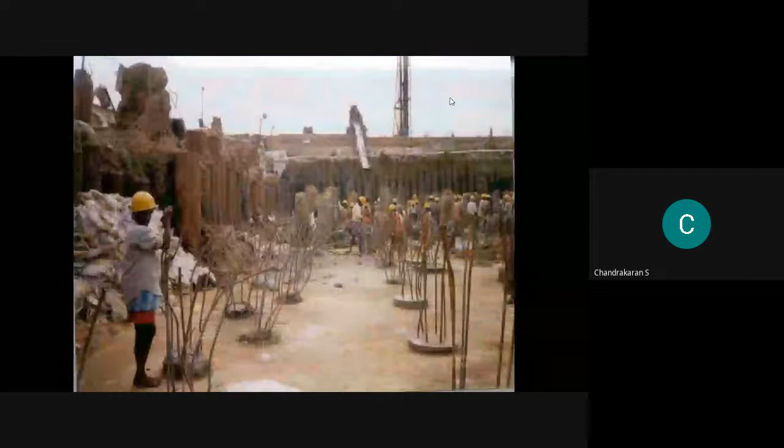Now this sketch shows what they do after pile chipping. Another method uses what is known as touch piles instead of sheet piles. Touch piles are inserted into the ground at very close intervals, sometimes in 2 or 3 layers, and they go below the proposed level by 1.5 times, which can be designed accordingly.

After doing the touch piles, people remove the soil and go to the required depth. Then the reinforcements are placed, and you can see the pile is made slightly more than the existing ground level, on which the pile cap is prepared. This sketch shows what is meant by touch piles. Secondly, after pile chipping, you rebuild slightly 5 centimeters or more, and on that the pile cap casting is started.

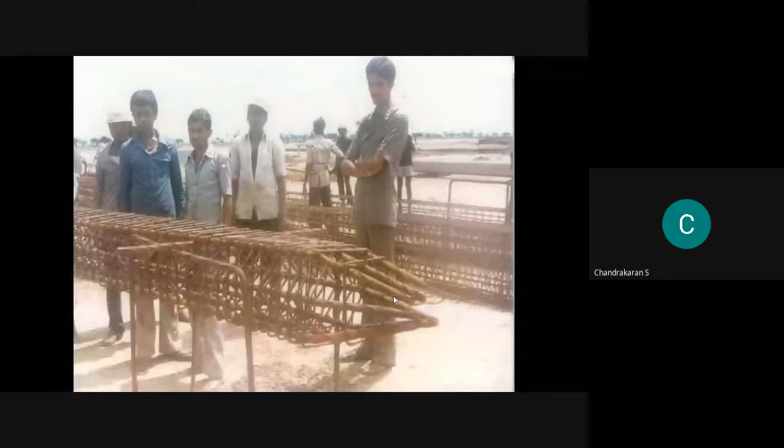These slides show what precast piles are. In precast piles, the reinforcement at the tip will be very, very large, and some people use a shoe also here so that it does not get broken while driving. The concrete mix used also will be richer than the conventional type. This is how precast piles are made.

Now the length of the pile depends on the rig used for driving. You make this type of pile and keep it ready for driving. This shows how the precast pile will be lifted, using a 2-point lifting system. We have different methods: 3-point, single point, etc. These precast piles can also be driven in the inclined direction.

You can see here the piles being driven, and after driving, if the pile required is 40 meters, we cannot drive it in one stretch. Different machineries are used: drop hammers, hydraulic systems, semi-hydraulic systems, and the efficiency with which the load carrying capacity can be calculated is based on the weight of the hammer, the amount of penetration, etc.

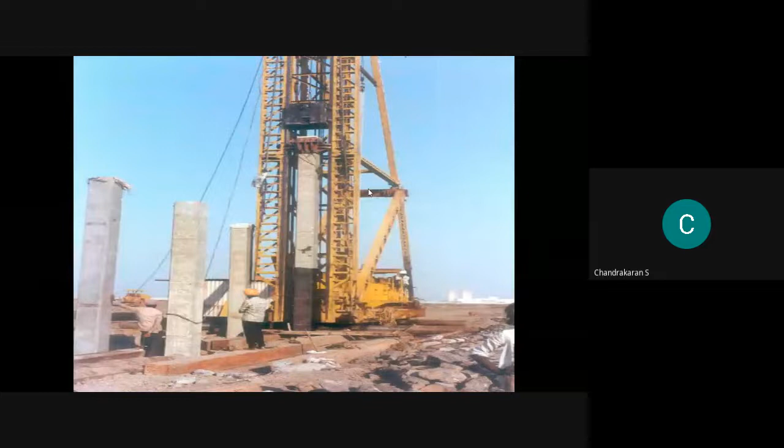These can be related using different formulas for calculating load carrying capacity. We cannot cast the pile in one stretch, so there will be joints in precast piles. Theoretically, we prefer joints at the bottom. For example, if we cast at 12-meter length and the actual pile length required is 20 meters, then 12 plus 8 will come, and we prefer the joint 8 meters or 12 meters below ground level so that sway or horizontal thrust is taken care of. Practically, however, the joints generally come at the top, which weakens your pile.

Then you can see how the joints are made. You will have some threads going inside the second pile, with proper locking in between, so that they act as a single unit.

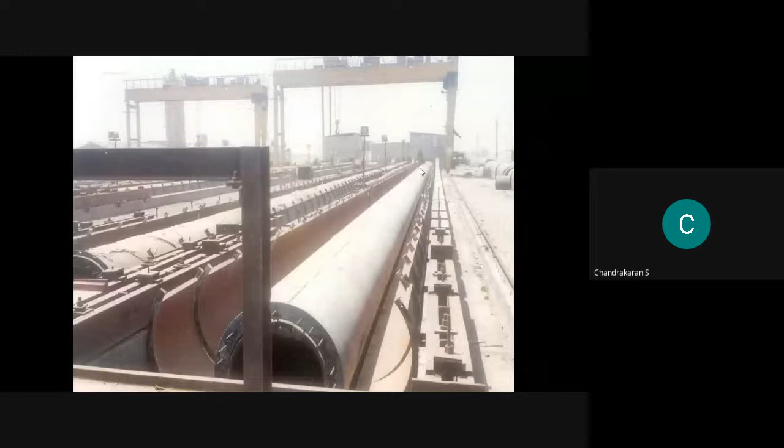Now this is precast circular piles, which is also used for different functions. This is kept as a batter pile. This part I am just keeping.

Now I'll go to another small topic, that is pile testing. We have different types of testing systems as per the code. Conventional testing, known as gravity loading, can be done, and that reaction can be generated by keeping loads on the platform, or by an anchor beam or truss system.

This is a time consuming process for the load test, but it is mandatory that you confirm what is obtained from theory and what is cast before going for the superstructure construction. So it's a time consuming one. That's why people are going for integrity testing as well as dynamic pile test. Both are possible nowadays. I'll be showing some sketches for this.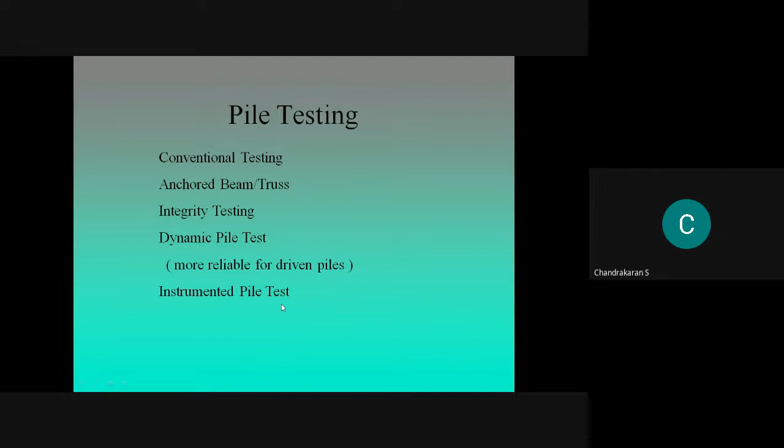If the structure is very tall and you want to ensure that the settlements are within the limit, you can do some instrumented piling also during casting. Some of the piles you can instrument, and during construction of the superstructure you can take readings and ensure that the settlements are within the limit.

Now you can see here, this is a pile load test arrangement. Whatever my arrow is moving to is the pile, and on that you have kept a hydraulic jack, with an inner ram and an outer ram. Then a string of steel rods will be kept, and dial gauges are placed in proper positions. As per the code, 3 dial gauges have to be used at 120 degrees apart. There is a standard procedure given in the code that I am not explaining here.

Now the reaction has to be generated. If the pile is expected to take 100 ton, at least 150 ton load has to be applied, and the reaction may be 180 or 200. Such loading has to be kept on top. This may be due to gravity, or an anchoring system, or some truss system.

Anyone can be used. Here we are following manual reading. We go very close and take the reading. You can use some instruments also for taking the reading. That is also possible.

This is a time consuming type, because you have to cast the pile, level it by plastering, then keep this arrangement and do the testing. Altogether it may take months.

Now another method is known as the integrity test. In that integrity test, we'll fix some small fitting that is available in the instrument. Then with a standard hammer, we'll give a hit. When you give the hit, the waves will move down to the bottom and come back, and you will have a transducer that absorbs this mechanical energy, converts it into electrical energy, and gives you the graphs.

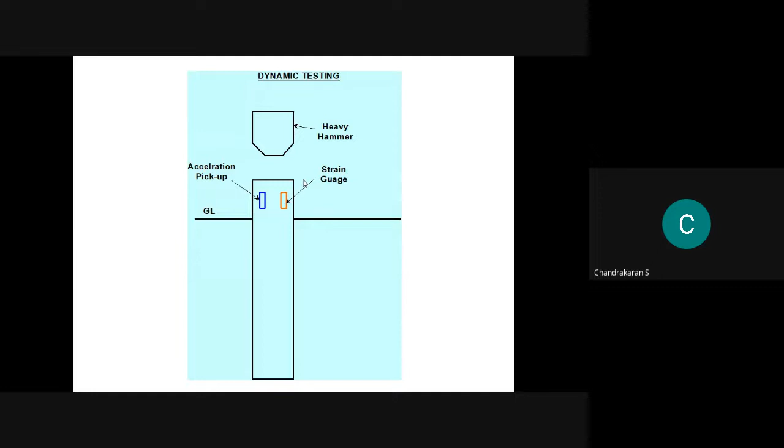Now I am just showing you this. If you want to do an exact analysis, you go for finite element analysis. Each one is taken as a discrete element, and you try to apply the load - vertical load, horizontal load, and lateral load - and do the testing.

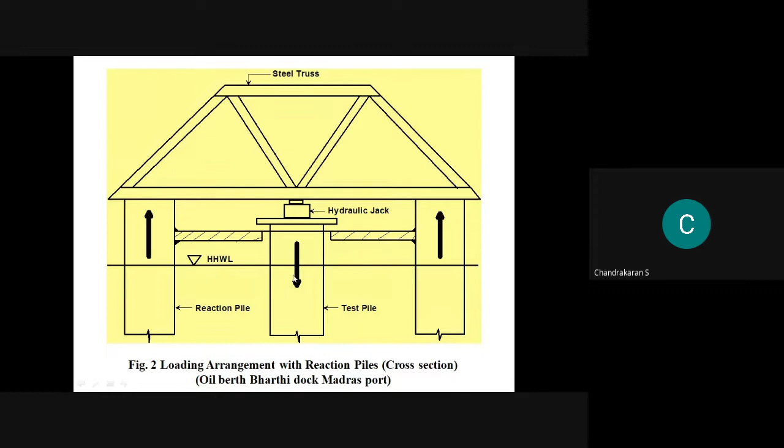That can be done. Now this type of reaction is also possible for small load tests. With the help of a truss, you will be able to load it, and you can see these are the reaction points. This is the pile point, and we will be able to do the test pile.

Now here also people have modified things by their own thinking. Many techniques are available. Some people keep tanks on this, loading with water or some material. You can do the testing that way. That is left to the concerned engineers.

But the procedure for the loading test is the same. You have to apply a seating load - this is the gravity loading. You apply a seating load, then remove it, then at a particular interval you apply the load again and wait for some particular time. As per the new code, there are small variations. Then you go for the next incremental load, and continue like that until you reach the settlements, then you unload.

The procedure follows some standard guidelines. For example, in the earlier code, the rebound also was considered. In the present code, rebound is not considered. Small modifications like that have come in the code.

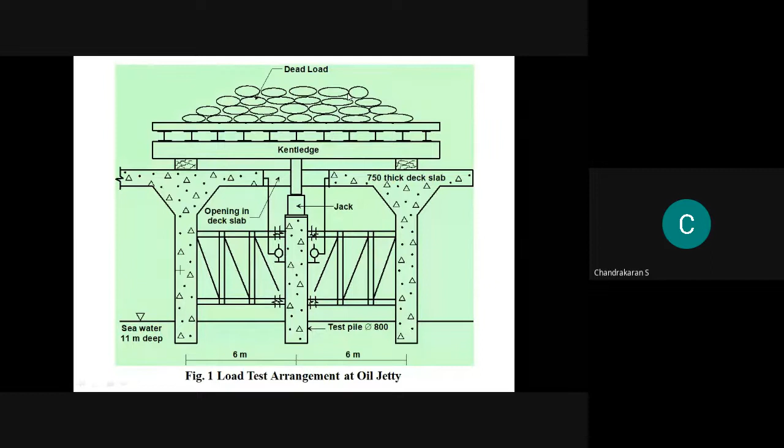Now I'm just showing you a pier. I am not going into deep pier detail, and nowadays below this, pile foundations are used, and then we use a deck. Then you can see here the resting - one part will be fixed, the other part will be free moving, and you will have a joint here that will be closed in a proper way.

The difficulties arise when you come across some hard rock, etc. There is a possibility that it may get tilted. Such possibilities are there in the field, and that has to be taken care of. So you have to rectify it, and it takes a lot of time.

And say in a hurry, if you make this well in 3 or 4 layers all together, because casting at 2 meters and casting at 4 meters involves the same labor. So if you make some 8 meters and start digging, if tilting occurs, rectification will be a difficult thing.

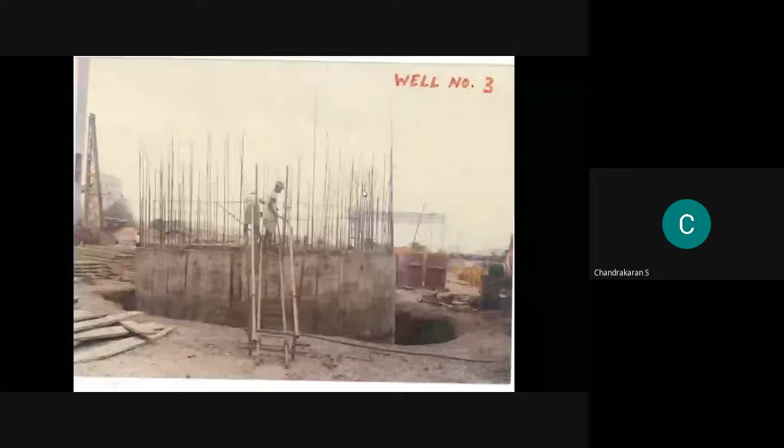Now I'll go to the last one.

This is regarding IS 2911 Part 3, 1980, the design of underream piles. Nowadays, underream piles are not used much other than for small structures, because of these difficulties, and the load carrying capacity will be lesser. But still, for small structures, people go with these underream piles. An underream pile means a bored cast-in-situ or bored compaction concrete pile with an enlarged bulb at the bottom, either by cutting or by scooping out of the soil or by any other suitable process - the bottom will have a bulb provided.

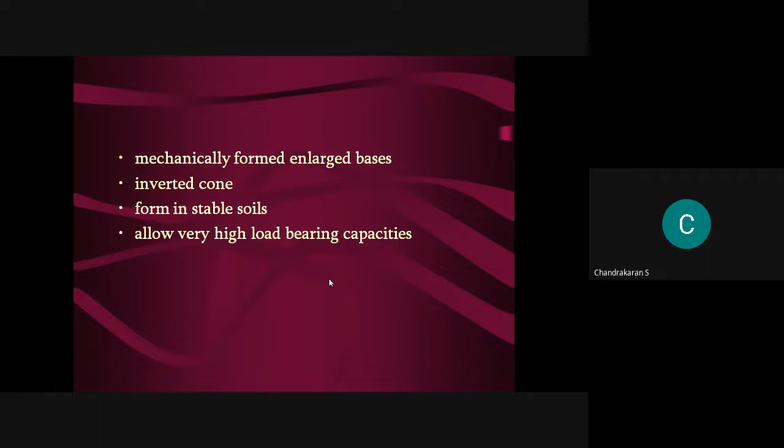It may have an enlarged base, inverted cone, or be formed in stable soil, allowing very high load bearing capacities. This particular code is used for construction of the underream pile. It may be a bored cast-in-situ pile, or it may be a bored compaction concrete type.

A bored pile means we will make the bore, fill it with, put the reinforcement cage, then fill it with concrete. Bored compaction concrete pile means we will make the bore, then fill it with concrete, then the reinforcement cage will be pushed in by some hammering or technique - that is the bored compaction pile. In the case of bored compaction pile, the load carrying capacity will be 40% more than bored cast-in-situ pile.

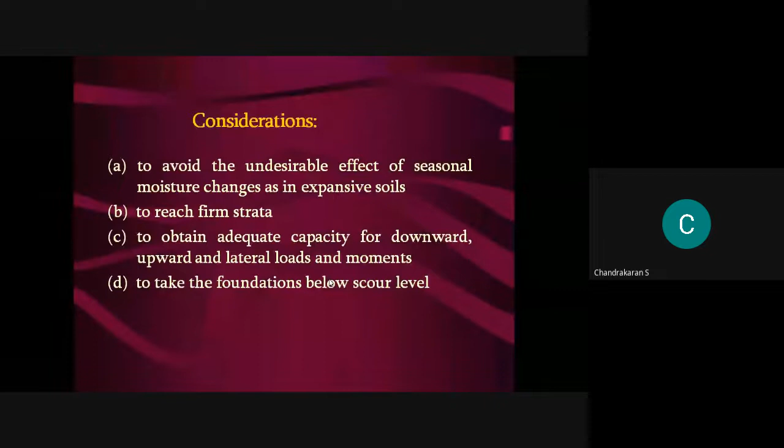The piles may be made with one or more bulbs to resist uplift, and can be used as anchors also. These are the two main advantages. This can be used for undesirable layers like expansive soil, black cotton soil, small filled-up grounds, and laterite quarries, where if you come across them and want to make single story or two story, or small structures where scour level has to be controlled - all these places it can be used.

This is what is given in the books. I wrote loose to medium pervious sandy or silty strata, etc. This can be used. Now in the design we have a lot of parameters.

One is pile diameter - what is the diameter that is to be selected? Second one is what is the spacing, what is the stem diameter and the bulb diameter ratios, etc. Some specifications are given in the code.

For example, the diameter of the underream bulbs may vary from 2 to 3 times the stem diameter, for piles up to 30 centimeter diameter. The spacing of bulbs should not exceed 1.5 times the diameter of the bulb. Then for piles with diameter greater than 30 centimeter, spacing can be reduced to 1.25 times. Like that, a lot of specifications are given.

The bulb should be kept in such a way that it will not touch the bottom. That is the problem for small diameter piles - that's why a range is given. But generally people follow 2.5 times the stem diameter for the bulb diameter.

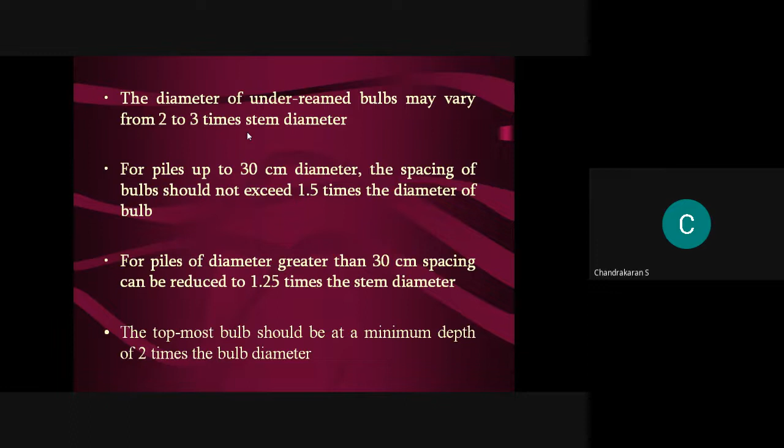Now, load carrying mechanism - it can be designed as a structural member, as a column, or it can be considered based on soil strength and do the calculation, and whichever is weaker, that will be considered.

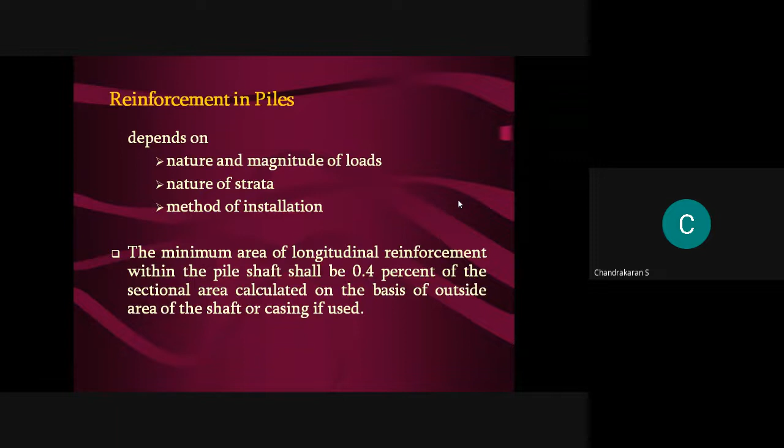Now, reinforcement required is very, very less. 0.4% reinforcement is sufficient in the piles, whereas in the column we used to go with 0.8%, and the number of bars also is less. For example, we can go with 4 number of 12mm bars, whereas in the column we have to provide 6 number of bars. Such variations are there.

Now the code has given some formula for the load carrying capacity, that is IS code. Some formulas are given - basically it covers two components as end bearing, two components as frictional. Here the frictional component is given for the sandy soil. The frictional component is given in the summation form. So 2 parts are end bearing, 2 parts are frictional.

I'll just show here - at the tip we'll have end bearing. Then here, the inclined portion, if you project it, there will be some end bearing we can get all round. Then the frictional component along the stem from the bottom up to this, then from here up to the top we will get the frictional resistance. Then we will have the frictional resistance from this inclined bulb portion - if you take the vertical component, we'll get some frictional component from this. So 2 frictional components, one from the bulb, one from the stem, and 2 end bearing resistances, one from the bottom, one from this projected one. That is what is used in this formula.

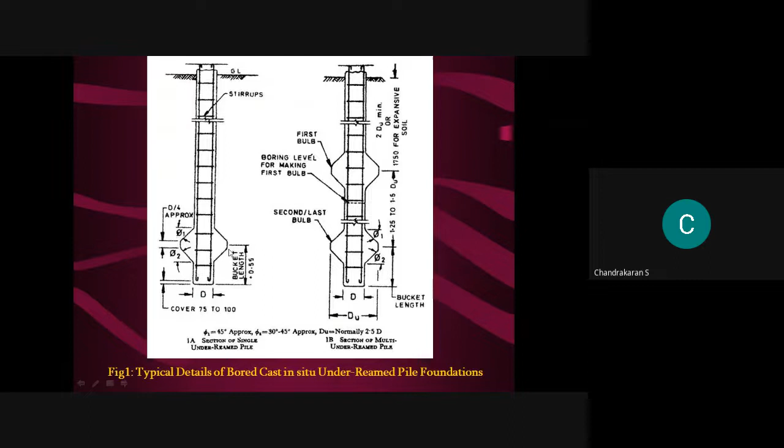In the case of clay soil, we will use cohesion. In the case of sandy soil, we will use angle of internal friction and modify the formula. This part I am not going into detail. And if N values are available, we can convert into phi value and go for the frictional components.

Spacing of the piles depends upon the space available, column load, etc., which we have to consider. Lesser the spacing, load carrying capacity will be reduced. Larger the spacing, load carrying capacity will be more, but the pile cap will also be more. We have to consider all these factors and arrive at the pile spacing, ensuring that the bulbs will not touch each other.

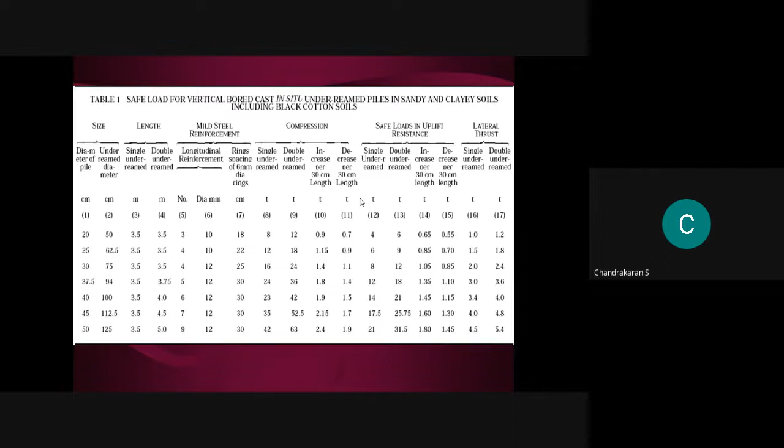As already shown in this table for the load carrying capacity that is available, either we'll go with this or with the formula. After getting this value, we'll modify it based on the N value. For example, if N values are very low, we have to reduce by some 25%. If N values are high, we can increase by 25%. If the water table is high, we can reduce by 25%. Such clauses are given in the code that can be used, and finally we will arrive at the load carrying capacity.

Regarding the pile cap, the pile cap is the structural element that acts between the pile and the superstructure to transmit the load.

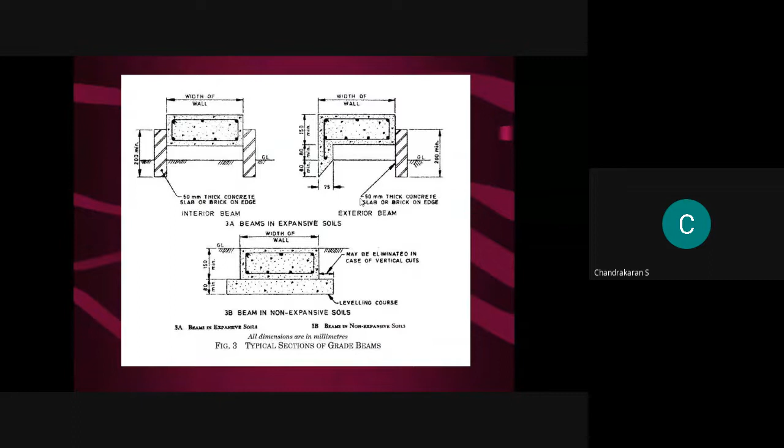Then plinth beams. As per this code, we can go with WL/20 to WL/30. For example, if the plinth beams are resting on natural ground, we can go with WL/30. If it is not resting on the ground, we go with WL/20.